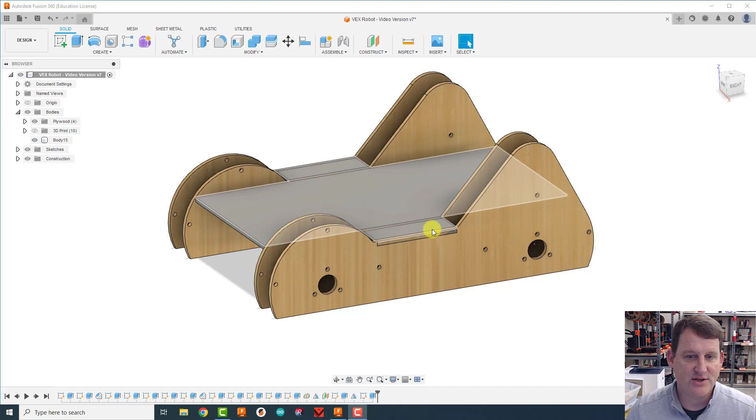Okay, so to do this, I'm actually going to cut it in this side panel. And I just noticed actually we never named our base. So I'm going to come over to body 15, double click on it, and do base. Whoops, something went wrong. Double click on it, base, enter.

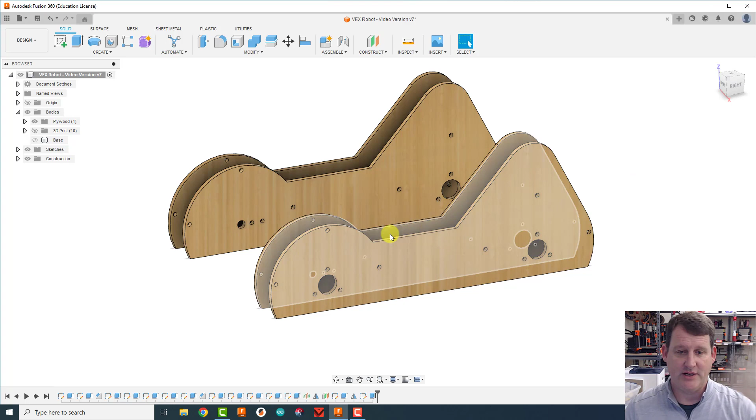All right, now I'm going to hide the base, and I'm actually going to cut these finger joints into this board first. So I'm going to create a sketch on the outside surface of the plywood here. I'm going to zoom in a little bit so we can see what I'm doing. And then I'm going to grab a rectangle tool, and starting in this top corner, I'm going to click and then just go over to the side.

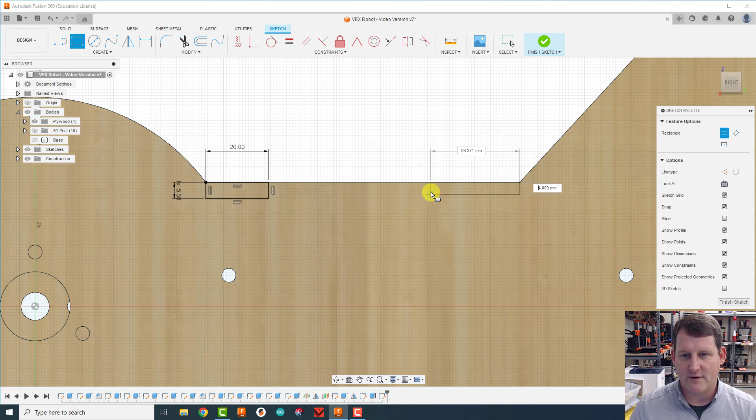I'm going to type in TH, enter for the thickness of it, because I want it to be 1 plywood thickness deep, tab, and then 20 for the top one, and hit enter. I'm going to go over to the other side and do the same thing. So in this corner, I'm going to click, drag over, and I'm going to do TH, enter, enter. Oops, I did 2 enters instead of just 1. All that means is I've got 2 options now.

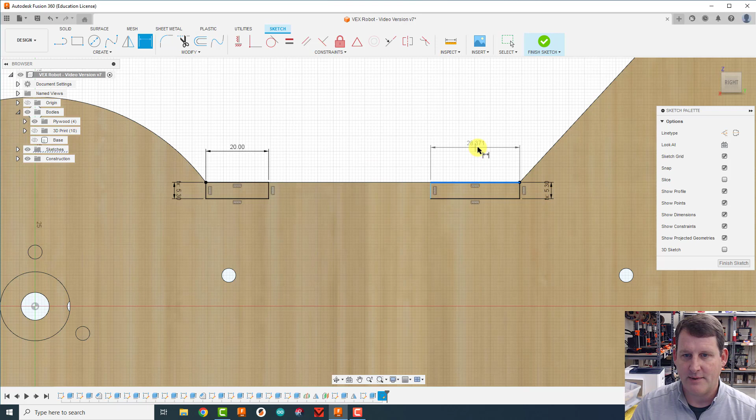I never put the dimension on for this side. I can Control Z and redo that rectangle, or easier, I can hit D for dimensioning, and I can just add the dimension later. So I click on the line I want to dimension, click up here at the top somewhere, and then just type in 20.

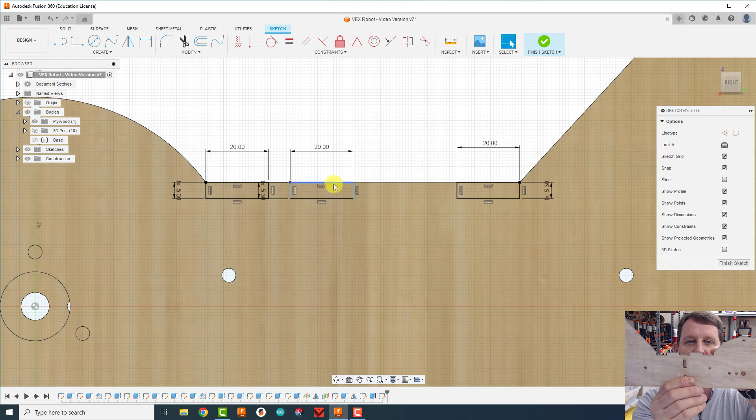Awesome. One more rectangle. I'm going to do another rectangle over here to the left, and I'm just going to come out here and do the same thing before. TH, enter, tab, 20, enter. Now I want this rectangle to be right. So what we're drawing are the rectangles we're going to cut later. I want it to be right in the middle. Instead of trying to eyeball it into the middle, I'm going to come up here and grab this midpoint tool. This is another great tool for lining things up.

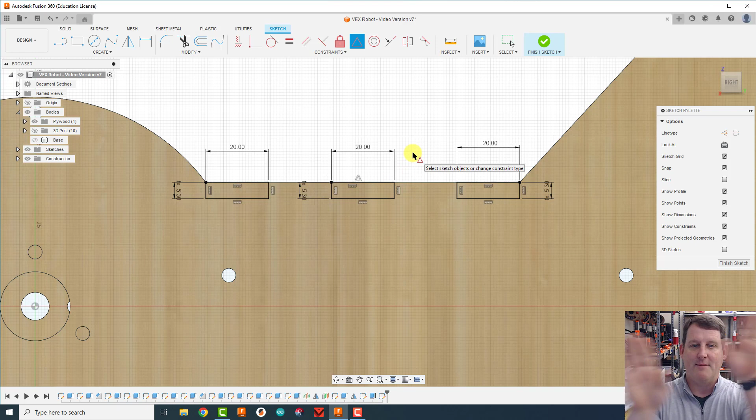So if I click the midpoint tool, I want to click on this short line of my rectangle, and then click back here on this long line back in the back, and it will put them on the middle of each other. So put it right in the middle like that. Great tool. I'm going to go straight to extrusion next. So E for extrusion. I'm going to click on these 3 pieces, tip it so I can see what's going on. Zoom out a little bit.

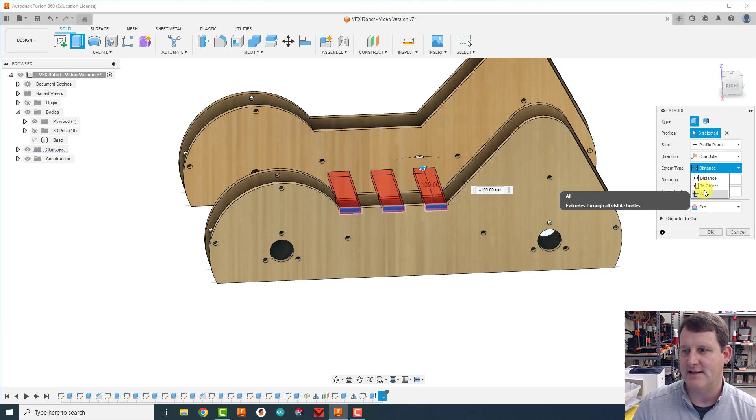And now I'm just going to drag the arrow in the direction I want to cut. And instead of trying to drag it all the way, I'm just going to come over here to distance and say all the way through. And in one fell swoop, we just cut all 4 panels with 1 extrusion. So now they're all 4 ready, which is pretty cool. If I turn our base back on, it's still gray. Let's actually add an appearance to that real quick. We'll put that bamboo on there.

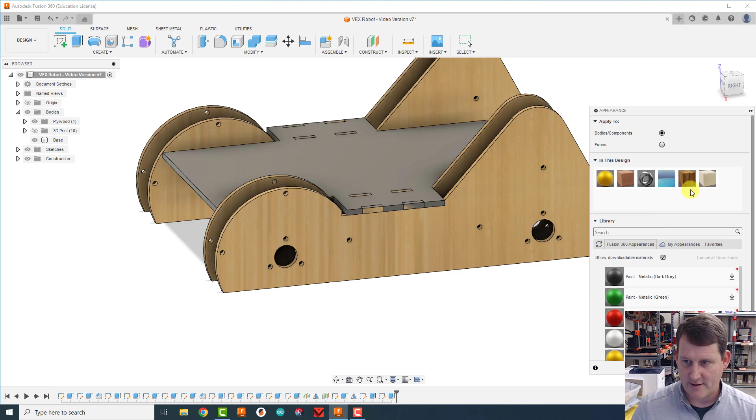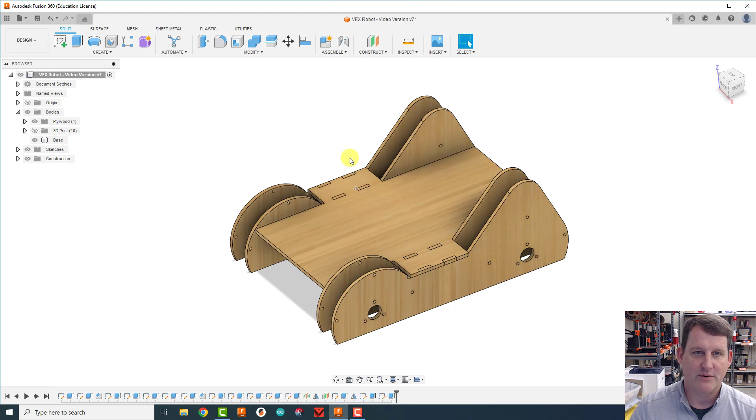And this looks fantastic. The only problem is if I turn off the plywood pieces, notice how there's no holes cut for those fingers to stick into. We're going to do that next. So I'm going to turn the plywood back on. Again, my 3D prints are just staying off for now. I need to cut holes into the base so that these little fingers can go through. To do that, I'm going to use the Combine tool. The Combine tool looks like this. If you can't find it, it's under Modify, Combine.

It asks us for a target body. Well, the target body is the thing that we're going to be cutting, and that's the base here. And I'm going to come down here and make sure it says cut and not join. What join will do is it'll make 2 parts that are separate, it'll like connect them together. So I'm going to do cut instead. And then I'm going to,

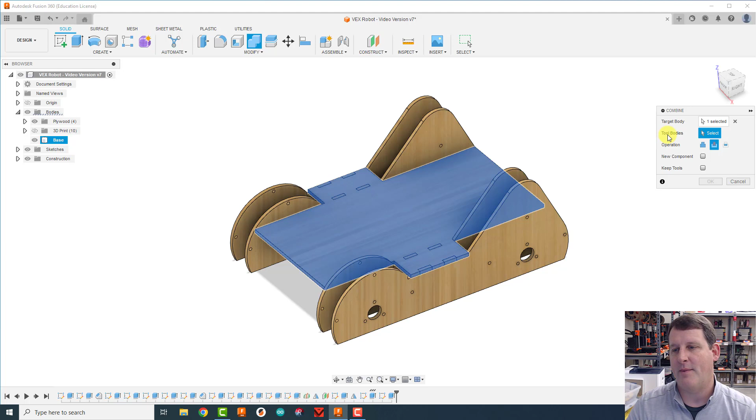it's asking me now what my tool bodies are. So my tool bodies are the things I'm using to cut with. So here I'm going to click on all of the panels, and you can see when I zoom in what it's going to do. It's going to actually cut holes. It's going to use the panels to cut holes in the base. So that's a pretty cool feature.

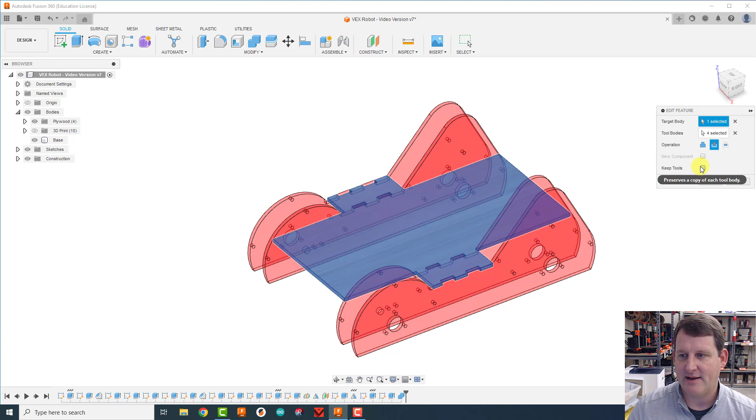Now, don't do this next part with me. I'm going to sit here. I'm going to say OK. And when I do that, it disappears my plywood parts. Like I have no more plywood parts. So to fix this, I can either Control Z, or I'm just going to right click on the Combine and do Edit Feature. What I need to do when I'm cutting is I need to click here that says Keep Tools. I don't want to delete the tools afterwards.

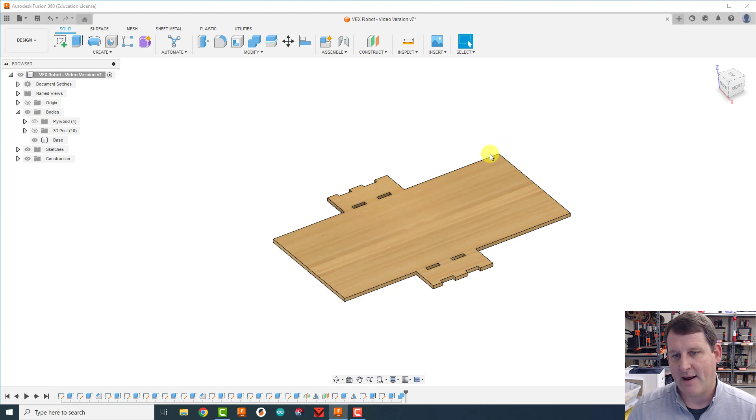And then I'm going to click OK. And now my plywood panels are still there. If I hide the plywood parts, I can see, bam, I have holes cut now. So yay, perfect. Now what we need to do is we need to create little tabs in all the back corners. Let me turn the plywood off. The back of all 4 of these corners, create little tabs that stick into the side panels to give our base some structure. To do that, I'm going to create a sketch right on the top surface.

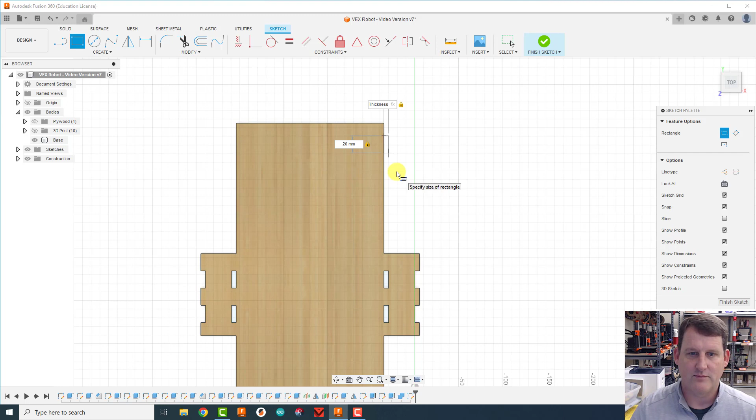I'm going to come up here, I'm going to grab a rectangle tool, go down from the side a little bit, and then create a rectangle on the outside. I want the length to be 20, and then the top to be thickness. Enter. In fact, let's change this 20. I'm going to double click on the 20, and let's change it to 25. I think that's a good amount.

All right, now I'm going to do D for dimensioning. I'm going to zoom in a little bit so you can see what I'm doing. I'm going to dimension from this side of the rectangle to the bottom line here, and then come over to the side and click one more time. Type in 10 and hit enter. I'm going to do the same thing on this side.

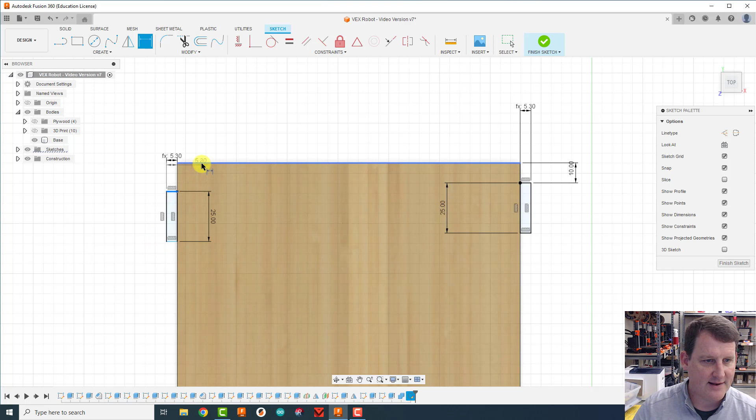So I'm going to grab a rectangle, drag it out and down, change the length to 25, and the thickness to TH, enter, and enter. D for dimensioning. Click on this side, the bottom side, come over here and put it as 10. Now I'm going to come down to this bottom side and do the same thing over again. So I'm going to put all 4 in here, one swoop.

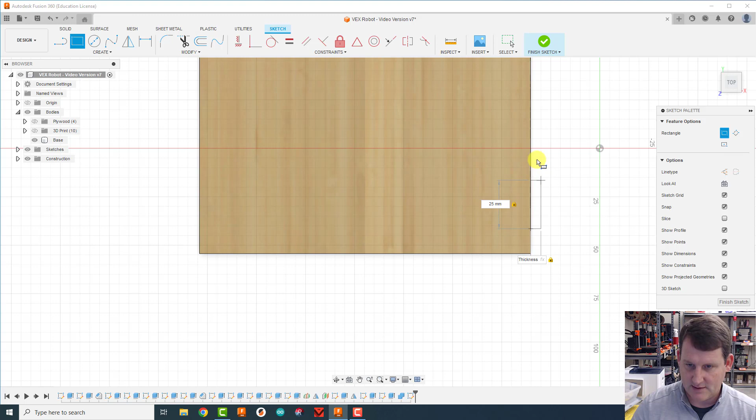So right here, this should be 25 tab, TH, enter, enter, whoops, enter, enter, okay. It wasn't wanting to enter. And then D for dimensioning, this bottom line this time to this bottom line, and then that's going to be 10. All right, one more.

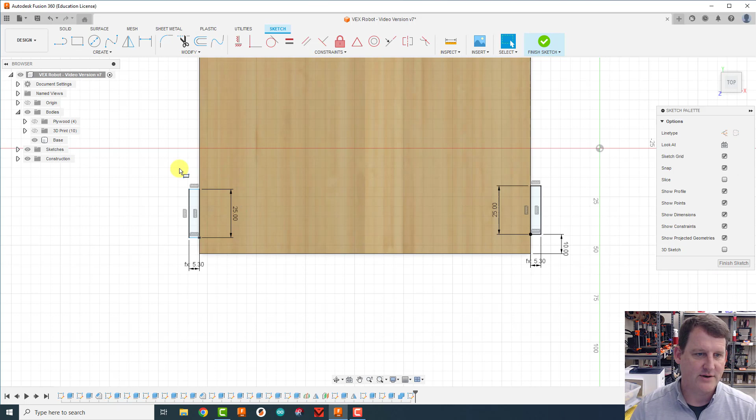I'm going to click down here, and this becomes 25, tab, TH, enter, and one more enter. And then D for dimensioning, bottom line, bottom edge of the robot, 10, enter. Perfect. Now I need to extrude these. I'm going to hit E for extrude, and I'm just going to click on all 4 of these shapes.

I'm going to hit the home so I can see what's going on. And I'm just going to type here. I lost my little number thing. It's up here, but if I couldn't find it, I could just click right here in distance and type in TH, enter. And you can see what it's doing. It's actually extruding up instead of down. I want to extrude this down.

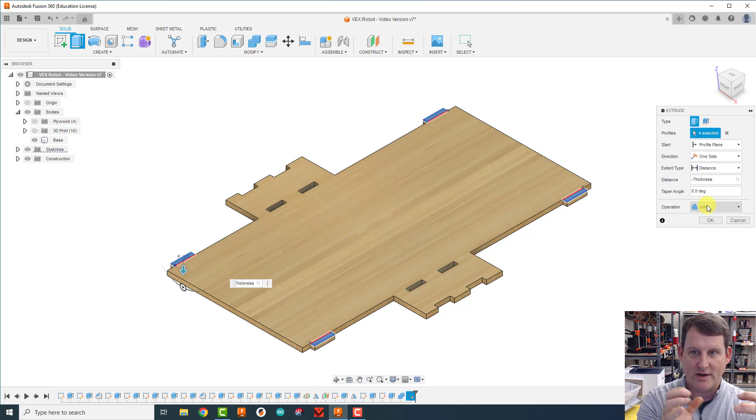So I'm going to come back over here, go in front of thickness, and I'm going to put a negative sign in front of it, and then it's going to go down instead. I want to make sure it says join here because I don't want 4 individual tabs. I want them joined as one piece, and then I'm going to click OK.

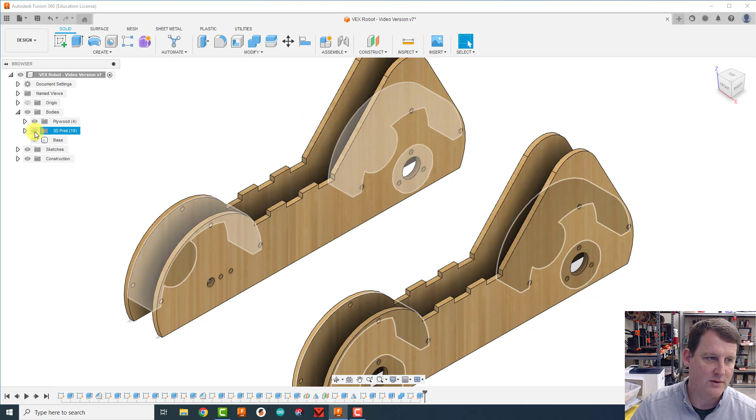All right, let's turn our plywood back on, take a look at what we have. So now we have these tabs going into the plywood, but again, if I turn the base off, I don't have holes for them to go in. So now what I'm going to do is I'm going to need to cut each of these 2 inside panels using the base as the tool. Turn the base back on. I'm going to do a combine cut.

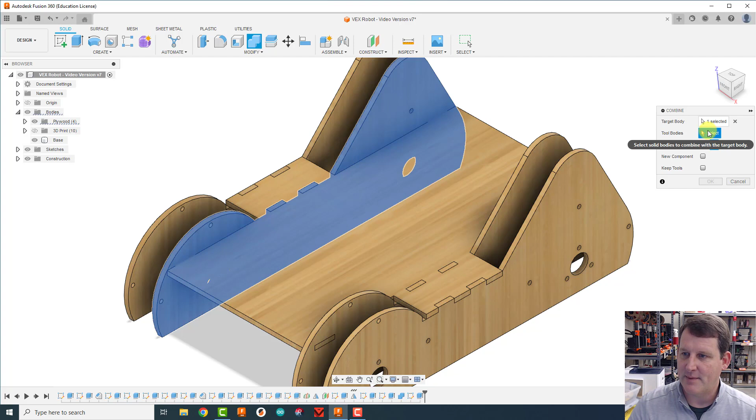I'm going to cut this inside panel, and my tool, now I can't cut 2 things at once, so I can't grab 2 target bodies. I can only do 1 target body at a time. So I'll have to do this panel and then do this panel separately. And then I'm going to come over here, make sure it says cut, make sure my tool is the base, and you can see now what it's cutting. It's going to cut this hole in right here and right back here. I'm going to say keep tools, and then I'm going to say OK.

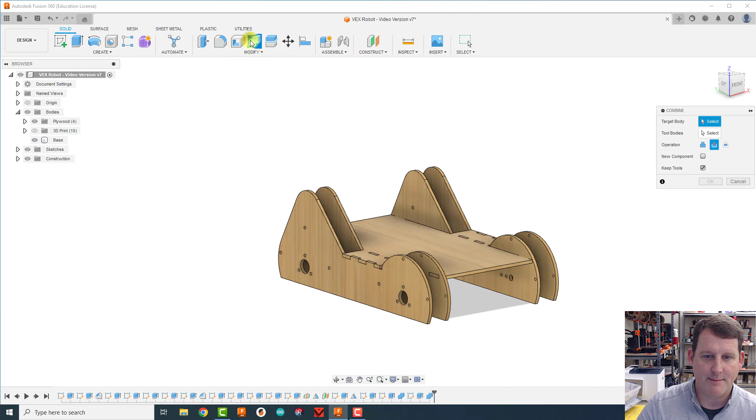Now I'm going to flip it around so we can see what's going on the other side. And I'm going to now do the same thing. Combine. I'm going to target this shape to be cut. My tool body is going to be the base. I'm going to make sure it says, oh, now we can see those little holes it's going to cut in there and there. I'm going to make sure keep tools is checked. I'm going to click OK.

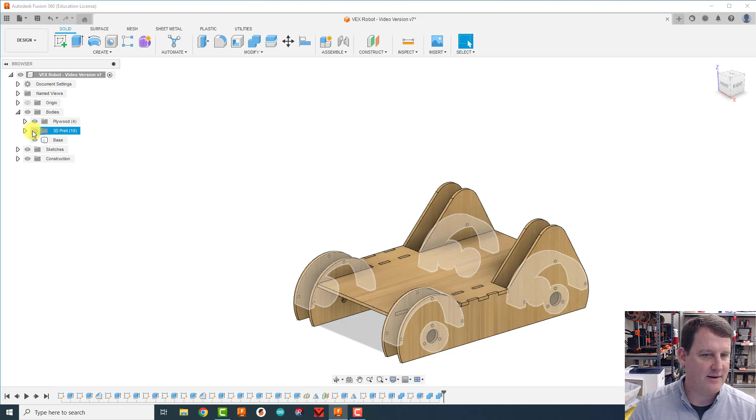And now if I hide the base, you can definitely see we have those holes built in. Awesome. Turn the base back on. Turn my 3D printed parts back on. Head up here. Let's look in here just to make sure I don't have any issues with overlap. Yeah, so you can see how the plywood is just going to just clear the plastic. So then we're good here. That 5 millimeters was enough there in the corner. I just wanted to make sure.

All right, my friends, that is the base. It is fully modeled and ready to rock and roll.